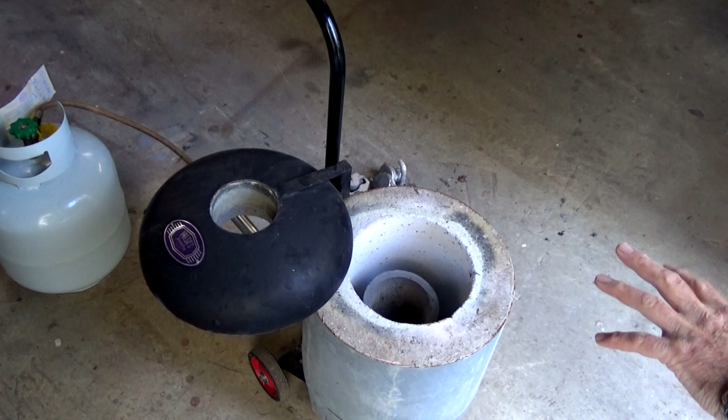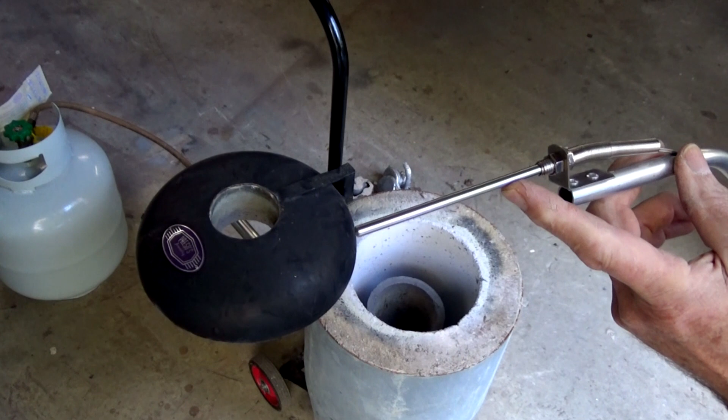Okay, I did mention I was going to do a couple of things to improve my chance of success this time around with this thing. And the second innovation that I want to show you is to be using a pyrometer. And this is it here. Now I bought this probe from eBay. It's called an EGT, or an exhaust gas temperature probe. It's good up to 1000 degrees centigrade, which is more than enough for melting aluminium.

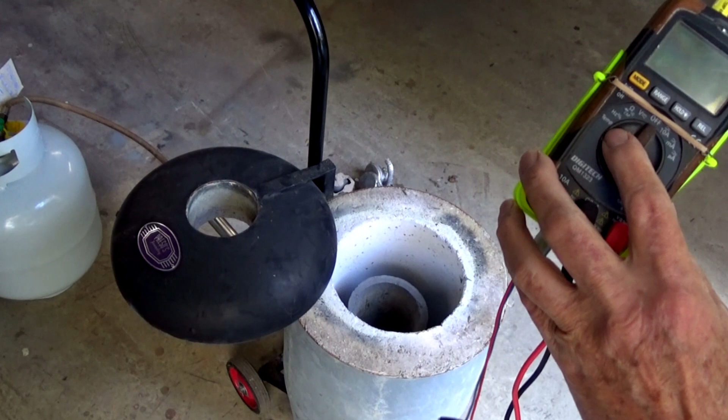And I've just simply mounted that to a stainless steel bracket, and it's pop riveted onto a piece of 12mm aluminium tube, which I bent just to make it easy to get it into the crucible. The shielded wire from the probe, which has got a stainless steel braided cover and it has fiberglass insulation on the wires inside, goes into a hole bored in the tube and comes out the other end where it's attached to my multimeter. Now this meter has a temperature function on it, and unfortunately I don't have the correct plug for my probe, so I'm just doing a bit of a lash up here just to see if it works.

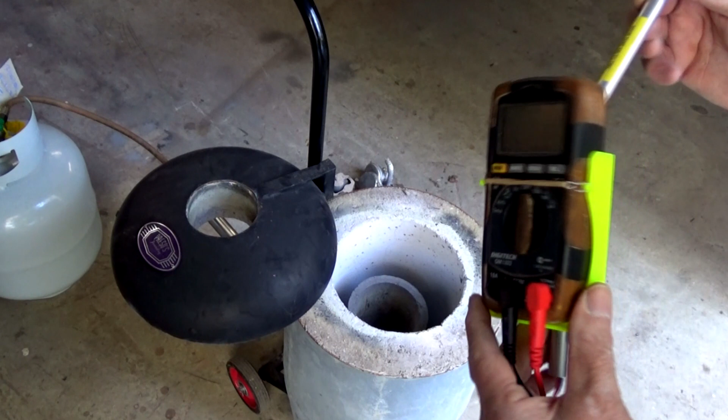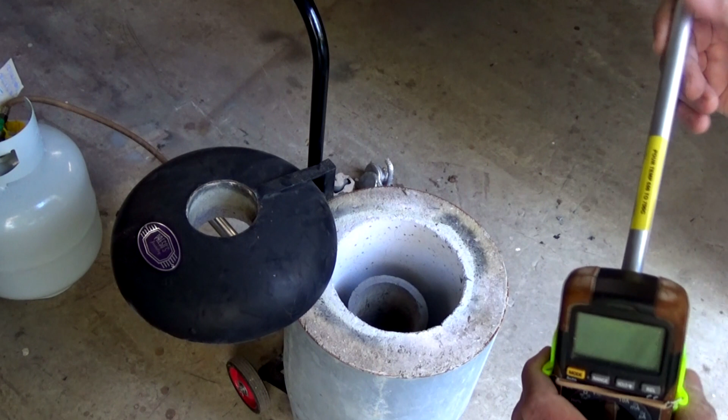I 3D printed this case for the meter, and it's got a pair of clamps here that clamp down to the tube, and the wires for the EGT just come out the end of the tubing and loop round up to the meter. So my temperature, I've got this marked on here at 650 to 700 degrees C, is what I researched as the best pouring temperature for the material that we're using, although I've heard of some people going lower than that. But what I want to avoid this time around is a situation where the metal cools before it fully fills the mold. So I just want to make sure that we've got the best chance of getting this to work. Anyway, I'm going to get lit up and we'll get going.

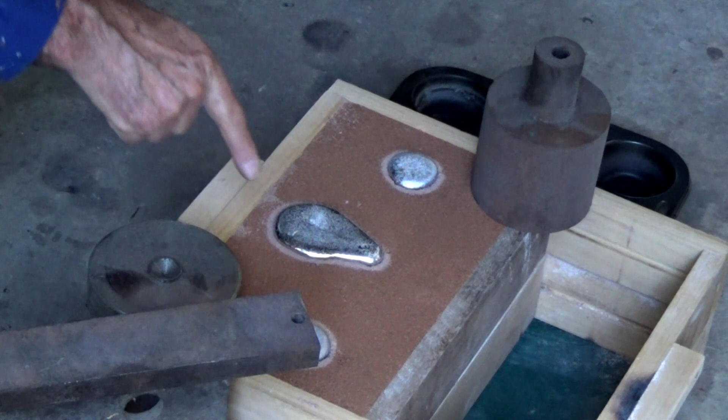So this mold here is my blast gun, and I did a second casting at the same time with a common sprue and pouring basin. That seemed to fill up quite well, so yeah, I'm feeling confident. But you never know till you break these things open, and that's the pity of it. When things go wrong, you've got no idea, and you've just invested 5 hours in getting all this ready. Anyway, we'll check it out shortly. Well, it's always a bittersweet moment when you open these.

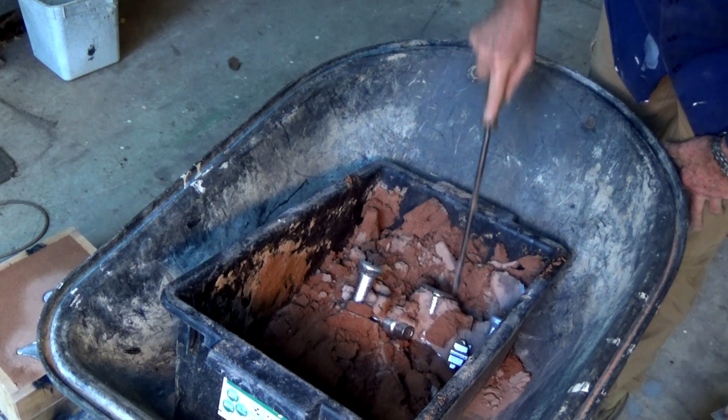Alright, I think we've had a win. So there's the blast gun, no voids anywhere around the outside of that. The core's done its job, as you can see, made the hole right through. There's my YouTube lightning bolt detail that's come out perfectly. So that is a success.

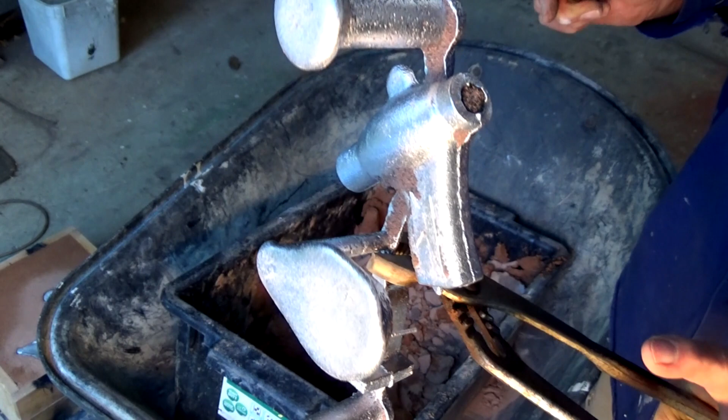Now this other one, that's for my bandsaw, my metal cutting bandsaw, and that was meant to have a core in it. I tried doing it with the core and I wasn't happy with it, so I've just done one as a solid casting, and I'll machine out the areas where the core was meant to be. But that is looking fantastic. I'm happy with that. So I'll get on now and I'll build the rest of the gun and I'll show you.

Just a little side note. Remember I put the vent through? Now, just by pure bad luck, that's where the vent came out through the top of the cope and it went right into the pouring basin. So that was sort of bad planning on my part. But it looks like the metal's flowed down from the top rather than coming up from the bottom. In fact, there shouldn't have been any passageway to the molten metal for that vent. That was meant to be a pathway for the gas to escape. But either way, it's worked. So that's great.

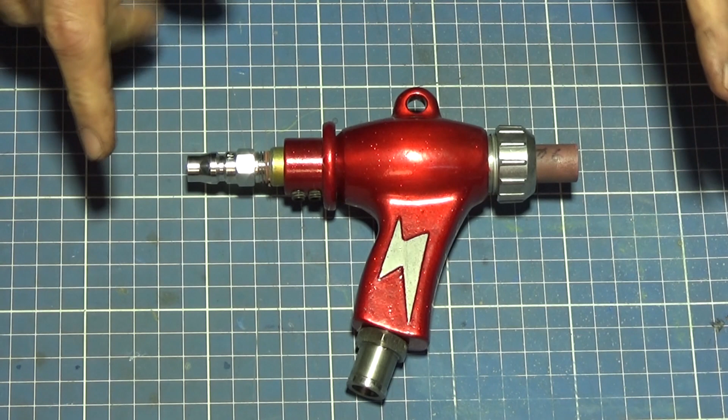Okay, there it is, all finished, and I tested it and it does work, and it is an improvement on the original gun that came with my blasting cabinet. Just to talk you through the finishing process, this was all sanded back. The casting was sanded over with wet and dry paper. I ground as much of the texture off the casting as I could, and this has been powder coated in a candy red sparkle, which gives it that lovely sparkly finish.

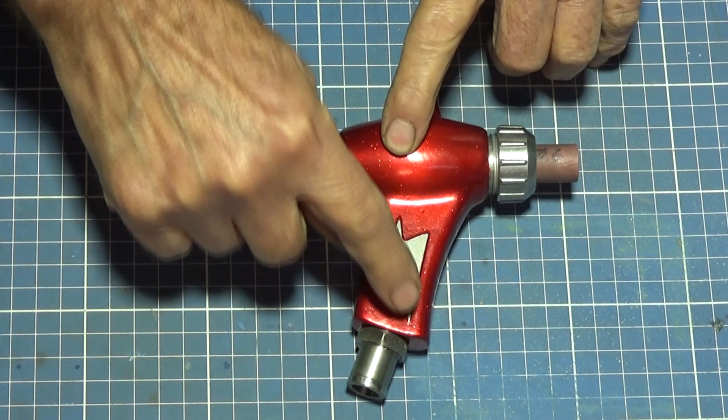And I then rubbed back the detail on the lightning bolt to expose the aluminium, and then the whole thing is clear coated again. The jet carrier or the jet nozzle assembly has been zinc plated. I'll show you that in a minute. I've used the original stainless steel coupling for the plastic tubing, which brings the grit up to the gun. And this is the original cap and nozzle that came from the original gun.

Now, what can I say? The lightning bolt and this little ring at the back here, that's just pure whimsy. I mean, that's just decoration. No practical purpose whatsoever. The only other change I made to the gun, I drilled out this little hole here. This was originally, I think, to hang this inside the blast cabinet. I don't think that that's necessary.

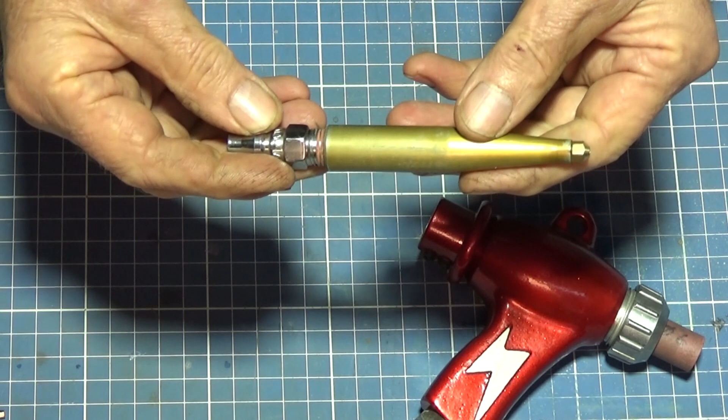I'll show you what I've done with the jet, and this has made it a little bit easier to control the size of the opening. So this is mild steel now. I did consider making this out of some sort of hardenable steel, but at the end of the day I don't think it's necessary. This has been zinc plated and put in a gold dip, which gives it that colour. It's very soft, and just sliding in and out of that casting a few times, it scratched that coating off, but it's just corrosion protection more than anything else.

Now I've got a brass replaceable tip in there, and you can remove those with a socket, and you can do it from the outside of the gun. You don't actually need to remove this assembly to do this. So I made a couple of these in different jet sizes. I think this is a 2.25mm jet. I've done a 2mm, but from the previous test I did, I think 2.25 is about right. It gives you a good vacuum and a good blast for the media, but doesn't consume too much air.

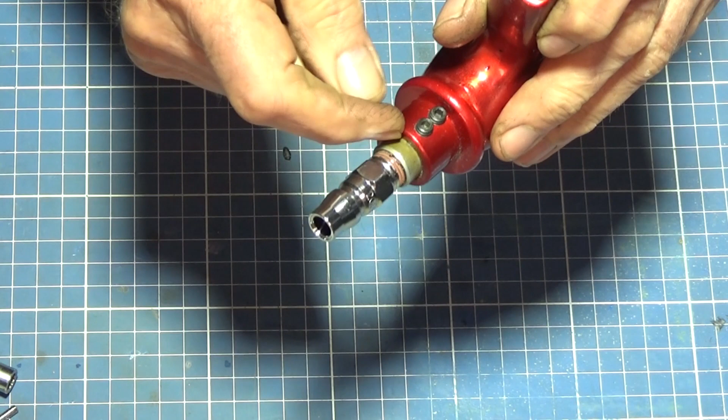So that's all good, and that goes back in and can be locked in place with a pair of socket-headed grub screws. And I've got a mark on there, and I've already tested this to work out the optimum position for that jet. So we can lock those two grub screws in place there, not too hard because it'll bite into the steel otherwise. I've already got my quick coupling on here. When this goes inside the blast cabinet, it'll be replaced with one of these.

So what I want to do now is just explain the differences between this gun and the original Mark I casting that I did. So that's the first casting with the cavity inside it cast with a core. This one here I've used a different style of core. So let's just have a quick look at that. This is a section of both the Mark I gun and the Mark II gun. Externally they look exactly the same. The difference is all internal.

So on the original Mark I gun, the tube which brings the media up to the mixing chamber was just a straight connection. There was no attempt to radius off that or blend in that opening to the main cavity, and the corners of that cavity were dead square. So a lot of people had commented and said it wasn't very streamlined, it would slow down the mixing of the blast media with the air, and it would lead to erosion on this corner here.

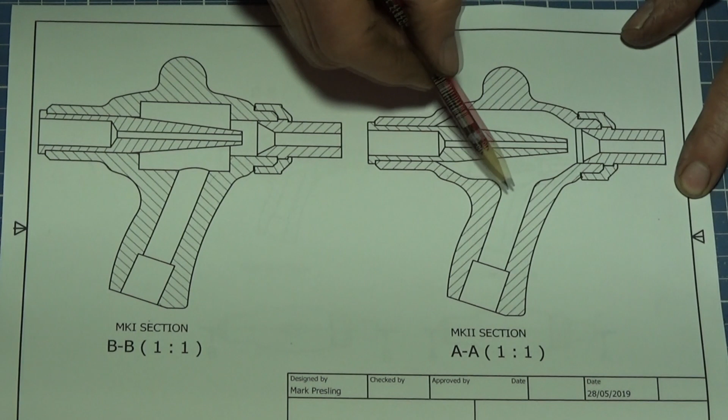So on the Mark II gun I restyled all that interior cavity. So you can see now that I've blended that corner and this front corner here with the radius, so that as the blast media comes up and mixes with the air, it's not drawn over that sharp corner anymore. I've also tapered the front of the chamber to match up with the taper on the nozzle. I've done the same at the rear, although that was more about just reducing the amount of thickness of metal at that end of the casting.

So this business end here is where we're going to get the blast media coming up. It sort of meets in this chamber here, and my understanding is that this chamber is acting like sort of a buffer. So when the blast media comes up, it comes up in sort of like bunches. It comes up as sort of large dollops of blast media, which I think are accumulating in this chamber and then acting like a buffer. So as the air jet accelerates the blast media out through the nozzle here, we've got a continuous supply, even though the blast media is coming up in a non-continuous fashion.

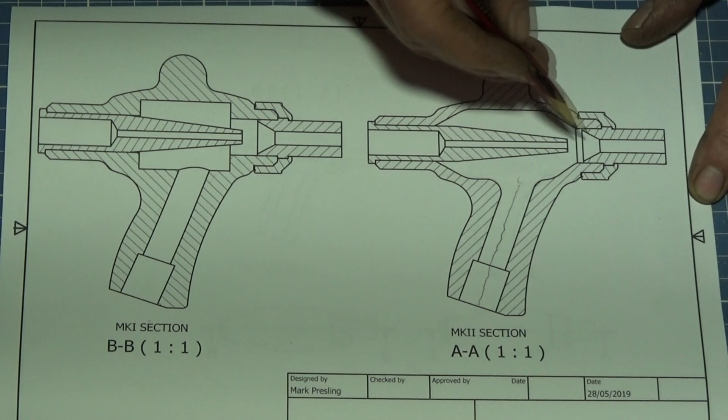Now, I sort of thought that if I can get this like a convergent jet, and then we accelerate the air through that convergent jet, that it would create more vacuum. Now, the surprising thing is that it doesn't. I've checked the old gun and the new one, and there's almost no difference in the vacuum, which I thought was surprising. I was sort of expecting and hoping that we were going to get a much better suction.

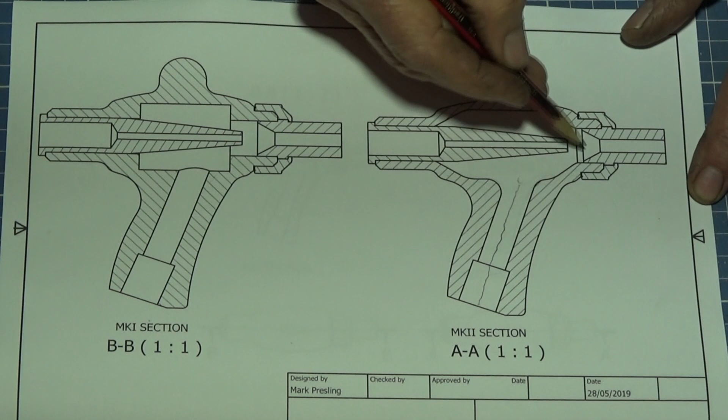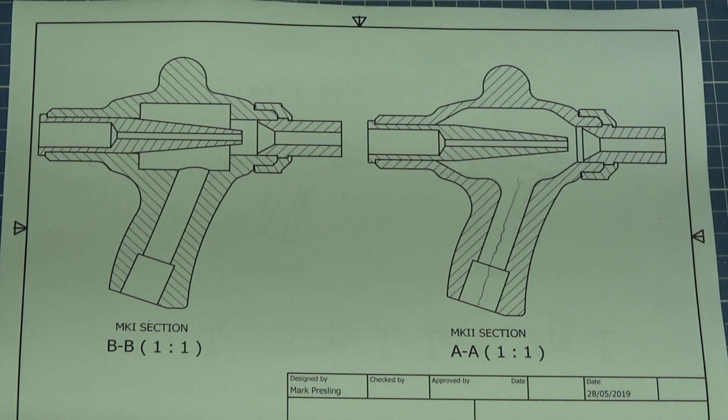Now, having said that, it does what I want it to do. I'm not unhappy about the way this new gun performs, and I'll show you in a minute how we can test that. So that's the internal difference in the shape, and like I say, the rest of it is just pure decoration and just making it look pretty, really. And I believe that if George Jetson was into sandblasting, this is the blast gun that he would use.

Absolutely. Okay, so how do we test this? Now, in one of my previous videos I showed you a manometer, which was a device for testing vacuum and suction, and I completely forgot I actually had this vacuum gauge, and I dug it out. It's on a vacuum pump that I use for doing some veneer work, and I've just made up a brass fitting here so I can connect it directly to the suction line of the blast gun.

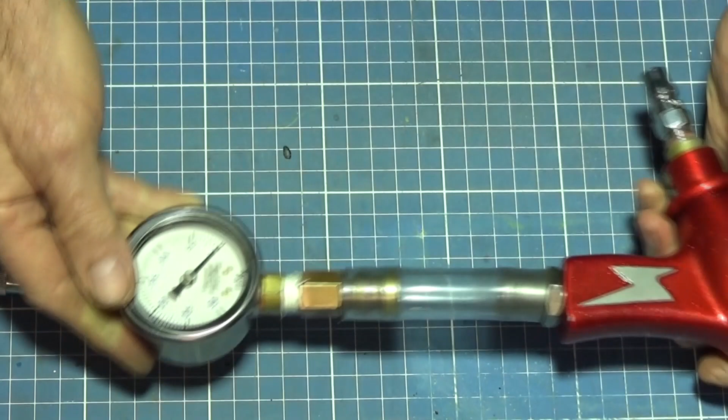So with it set up like that, we can connect the blast gun to some air using a realistic pressure of about 80 psi, and we can read the vacuum directly on the gauge. So what I'm going to do first, we'll set up the old gun, the original one, and we'll do that test and have a look at what result we get, and then we'll check out the new one.

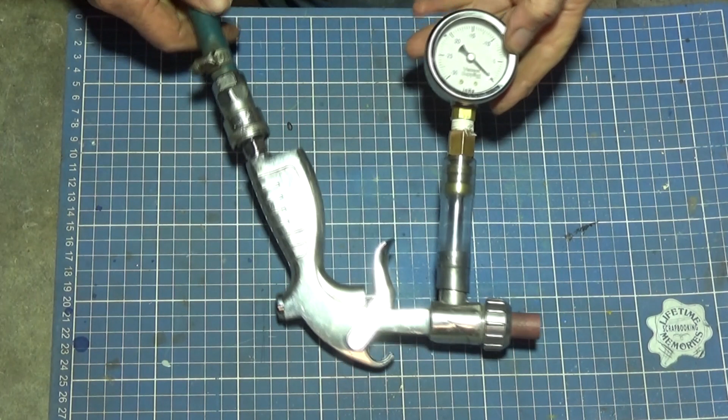Okay, well here's the setup I'm using. I've got the gun connected directly to the air line. I've got my regulator set to 70 psi. I've got my gauge here which reads in inches of mercury. Now I just checked, and 1 inch of mercury is equal to about 3.386 kilopascals. All we want here is a comparison, so I'm not too worried about the units. So let's connect this up to the air and just see what happens.

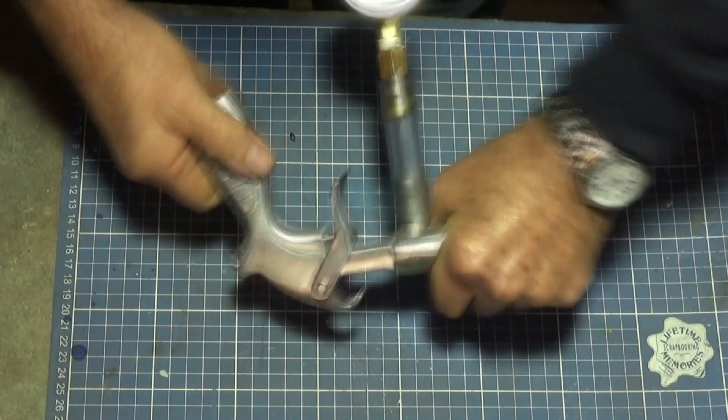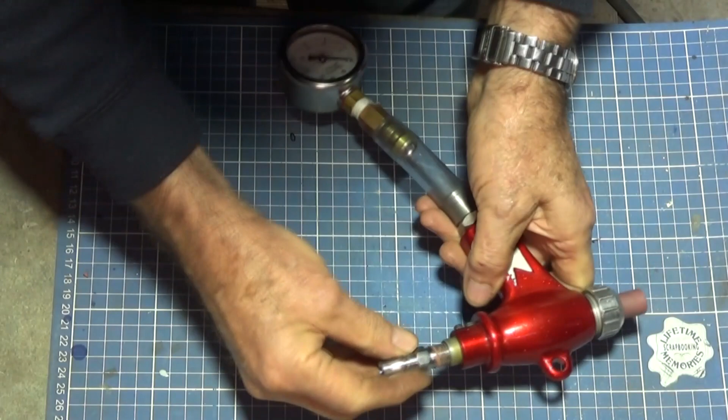Okay, I read that at 14 inches of mercury. So we're going to swap over now. We'll put exactly the same setup on the new gun. Alright, now I've got no air valve on this one, so as soon as I connect the air line we're going to get a reading. So we'll try that.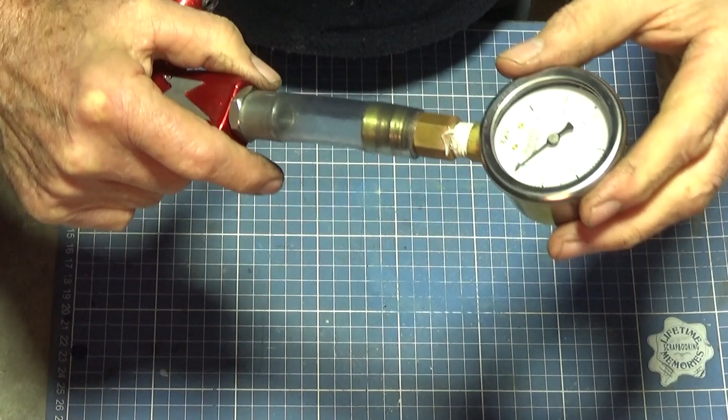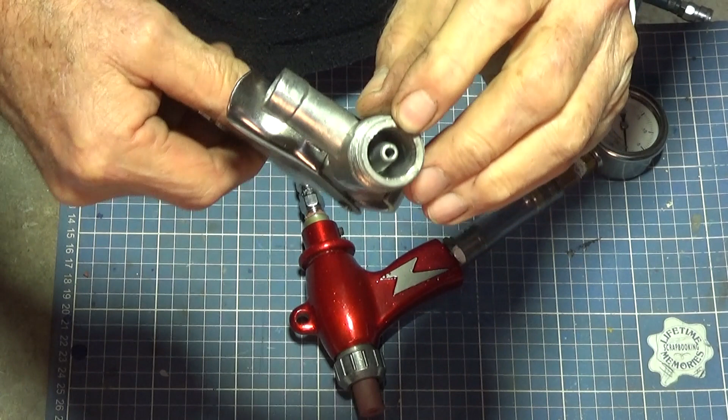Alright, so I read that at 16 inches of mercury. So we've gone from 14 to 16, which doesn't seem like a huge difference. But the important thing is that the size of the jet I'm using here is 2.25. The size of the jet in this one is more like about 3.5, maybe 4. And this uses a huge amount of air. My compressor just can't keep up. With this one here, I'm getting more vacuum, but using less volume of air. So that's a win as far as I'm concerned.

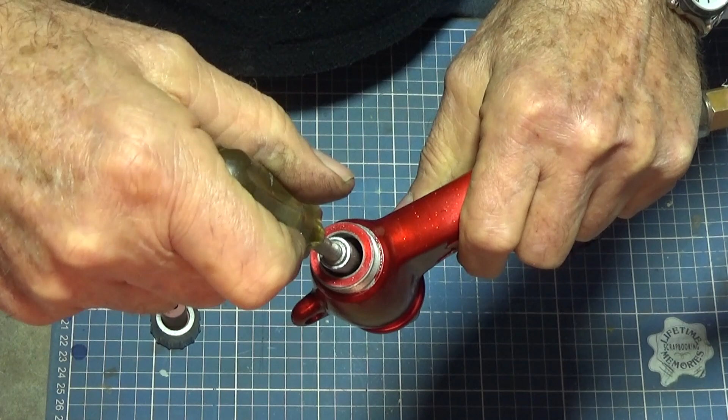I'll just show you that you can get at that little brass jet. You can see it inside there, and I can just put a socket down in there and remove that, swap out the jets if I need to. So if these brass ones ever wear out, I've got a way of easily removing and replacing those.

Okay, I just worked it out, and I'm getting about a 14% improvement in vacuum with this gun. When I did my initial tests using the manometer at very low pressure, I was getting an increase of about 45%. I knew those results were skewed because of the very low pressure. It seems like as we come up to a higher pressure, the vacuum properties of the guns are getting closer together. Now at the same time, I'm not too worried about that.

The more important test is, does it deliver the blast media at a higher velocity, or do we get more volume? To do that, I need to set up another test. I'm not going to cover that in this video. I'm going to revisit this later on. What I've done is I've ordered some clear acrylic tubing, and I want to make a replica

of this gun with a clear body, and then we can visualize what's happening to the grit as it's being sucked up into that chamber, and find out whether it is actually storing it and then shooting it out through the nozzle, or whether it's just being consumed as soon as it arrives in that chamber. But until we get a see-through blast gun, we're not going to be able to tell.

At the same time, I'm going to do another test inside the blast cabinet itself. I'm going to see how much grit this can deliver at a set pressure compared to this gun here. That is probably the best real world test we can do on this. But for the time being, I'm just happy that it's shiny and red and it's got lightning bolts. So for me, that's a win.